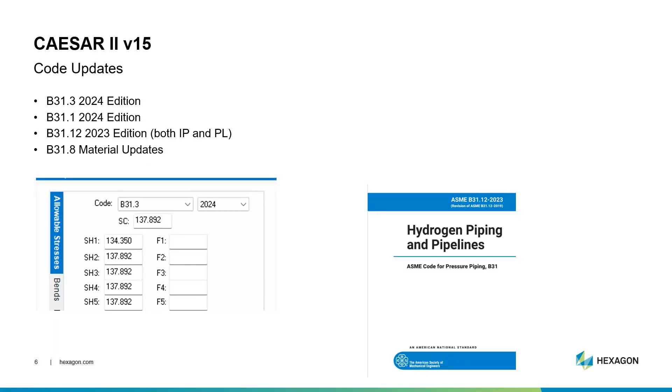This was a new code introduced in version 14 of Caesar 2. We implemented the 2019 edition, which was the latest at the time. Since we released version 14, the 23 edition was released of B31.12, so we implemented that update to both the industrial piping and the pipeline section of that code. There were some material updates for B31.8, and we implemented what I'm calling the piping adjacent codes - B31J, the updated 2023 edition for stress intensification and flexibility factors, B31G, the remaining strength of corroded pipelines standard, the latest 23 edition. And the building code, IBC 2024, was also implemented for the environmental loadings.

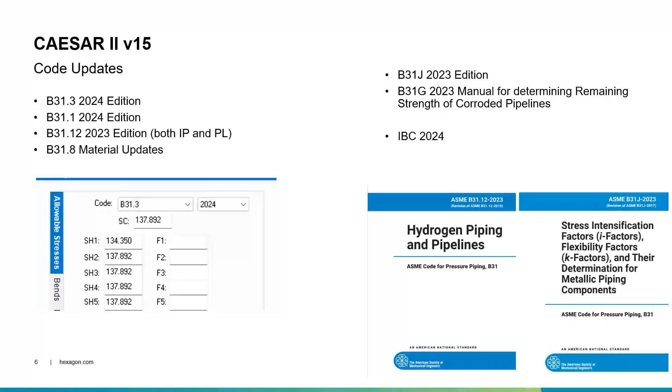Let's talk in a little more detail. Let's start with the three piping codes, B31.3, 1 and 12, that were implemented. For B31.3 2024, both the main body and Chapter 9, the high pressure piping portion - the changes in the code itself didn't have any impact on the calculation side of things. There were no changes to any of the equations within B31.3 2024 on the Caesar 2 side compared to the previous edition, the 22 edition.

But we did implement this, and it involved updates to the configuration, the load case templates, and the report templates. There were also a number of material changes. For the main body, 53 materials had updated expansion coefficients, and just over 106 materials have been updated for the Poisson's ratio and/or density according to ASME Section 2. For the high pressure piping, 51 material records were created with allowable stress values, and 14 materials had updated expansion coefficients. Quite a lot of work there with material updates.

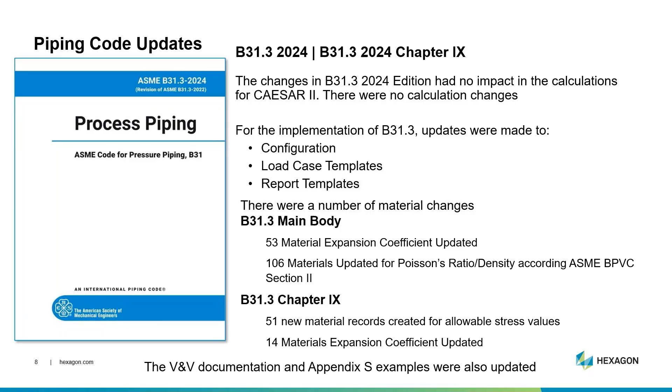Now, B31.1, similar to B31.3, the 31.1 24 edition, there were no changes to the calculation side of things, but once again we did have to implement changes to the configuration file, the load case templates, and the output report templates that were needed to ensure everything was reading correctly, showing the correct additions, etc.

And for the hydrogen piping code, B31.12, we made some updates for both the industrial piping, or IP section, and the pipeline section, the PL section. The main changes were in the IP section, and IP now refers to B31.3, so there were a number of calculation updates.

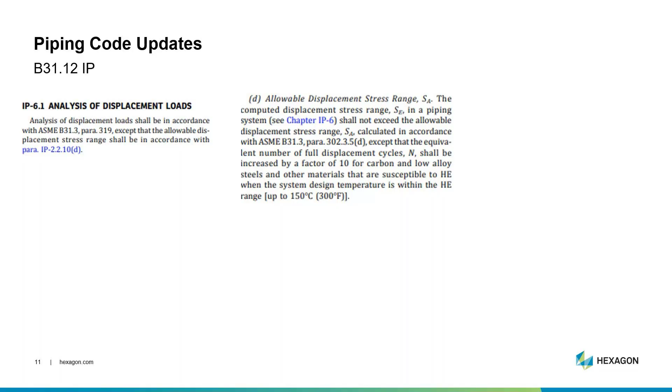So for displacement loads, analysis shall be in accordance with B31.3 paragraph 319, with that exception at the end: except the allowable should be in accordance with the paragraph from the B31.12 code, 210D, which states basically the same, however notice there is a slight difference in the displacement cycle N factor. So the only difference there between B31.3 and B31.12 is the allowable, and it's the same for sustained loads.

Analysis shall be in accordance with B31.3 para 320, except that the maximum stresses shall be as per IP 2210C, shown here on the right-hand side, using the allowables from the mandatory appendix in the B31.12 code. So the change there is all the calculations refer to B31.3 - the only difference between 31.3 and 12 is the allowables.

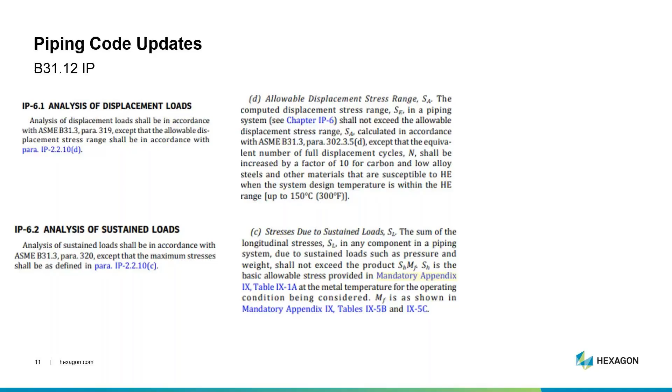And on the PL pipeline side of things, there were no changes that affected Caesar 2, but a note I want to point out is B31J is not mandatory for PL. Of course it is mandatory for the industrial piping, the IP section, because that refers to B31.3, but that's not the case for pipelines. B31J is not mandatory, but it can still be used via the B31J configuration directive.

There was one additional change for the PL pipeline side of things, made to match up with the industrial piping section, because the pipeline section isn't explicit in stating this, but we allow the user to make the choice. So the stress range factor F is allowed to go up to 1.2 for both IP, which does explicitly state it, and also the PL pipeline section. So for both of these you can use stress range factor F allowed up to 1.2 by setting the radio button as shown in the screenshot.

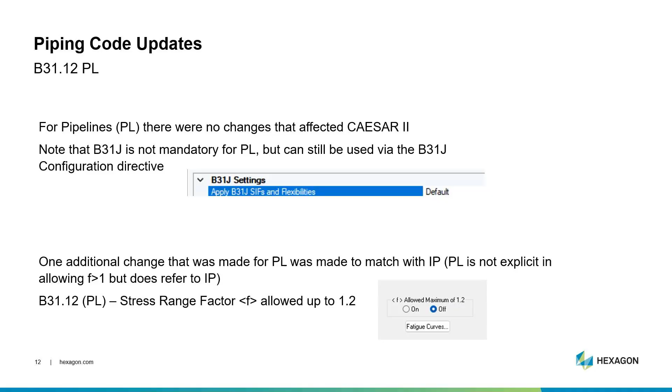Okay, now for the piping adjacent code updates, this is where there were some more involved changes. So the piping adjacent codes, what I'm calling them, meaning B31J and B31G. Let's take a look at each of those in turn, starting with B31J.

Of course we've implemented that, so that involved some updates to the calculations, and also, which will perhaps affect users a little more, a number of configuration variables. With these new configuration options, we've also updated the scratchpad interface to account for those. So let's talk in a bit more detail on this.

So we have 3 new configuration variables: use the smooth 90-degree bend correction, use sustained stress index correction for OD over T greater than 50, and welding and contour tees quality.

And then there is a change to the existing configuration, apply B31J SIFs and flexibilities. Previously that was a yes and no switch. Now we have a third option, so we have default, yes set 2017, and yes set 23.

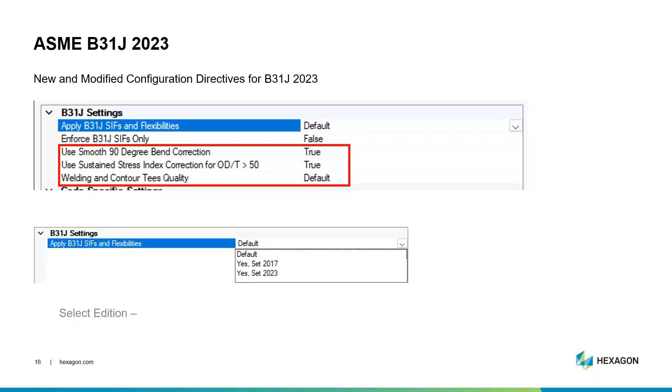So for select edition, well I guess the second two are fairly clear, but let me explain them all explicitly anyway. The option default is do as per the piping code release. So for something like B31.3, which mandates B31J, use the edition of B31J that was active at the time of the code release. For example, B31.3 2022 would use B31J 2017 edition, because that was the B31J edition effective at the time of the B31.3 release. B31.3 24 edition uses B31J 23 edition.

And for something like EN13480, B31J is not used because EN13480 has Annex H and does not mandate B31J.

If you set to yes, set 2017, that forces B31J to be used and also forces the usage of the 2017 edition. And similarly, if you set yes, set 23, force B31J and always use the 2023 edition, regardless of when the piping code was released.

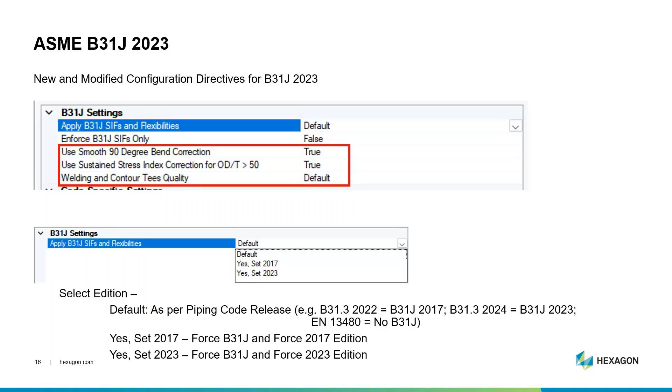Let's change there to the edition or the apply B31J SIFs and flexibilities switch. But what about the new configuration switches? We have three of those. First one, use the smooth 90-degree bend correction. This is all related to note 3 from B31J, and this is a fairly highly requested item. It was something I've been asked for a number of times personally, and I've seen a lot of requests come in for this setting.

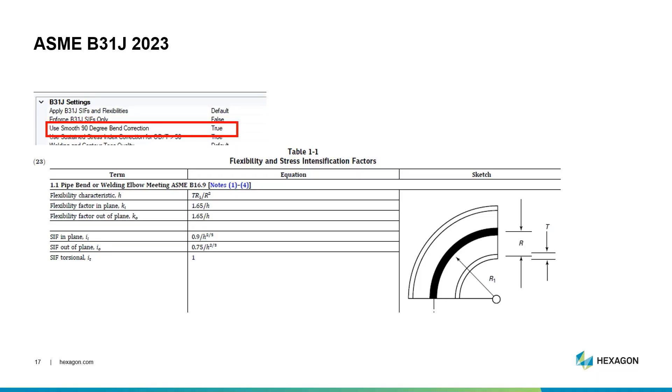So the point is, if I activate this, we can see all the images now. Note 3 is the key part here, which states when the bend angle is 90 degrees and the bend thickness is equal to that of the pipe, the flexibility factors may be found from 1.3 over H. Now, table 1.1 gives a flexibility factor of 1.65 over H, but note 3 says for 90-degree bends, use 1.3 over H, which is a more accurate value for a 90-degree bend. The 1.65 over H is more applicable for larger angle bends, like a 180-degree return bend. 1.3 over H is a better flexibility factor for a 90-degree bend.

So we have the use smooth 90-degree bend correction, which will use the 1.3 over H for a 90-degree bend if the factor is set to true. Set the value to false, you use 1.65 over H.

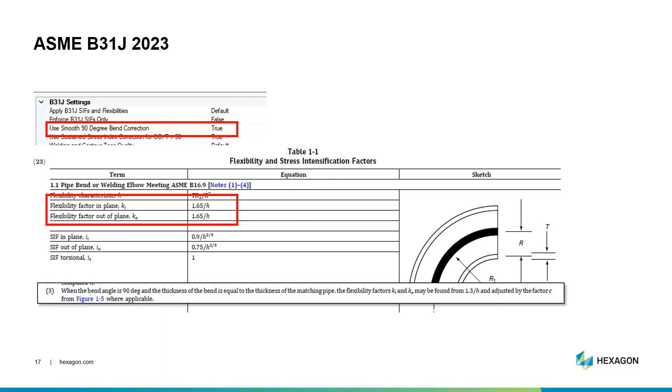And finally, the one that will probably take a little more explaining, the welding and contour tees quality. This is according to note 6 from table 1.1. That's the table you saw a few minutes ago, at least an extract for bends. Of course, it goes on to give the equations for the T's and so forth. But anyway, note 6...

...shows sidewall thinning, undulation, and so forth can reduce fatigue life. The sketch 2.1 stress intensification factors are based on components free of defects. Sketch 2.3 stress intensification factors, that's an unreinforced fabricated tee, may be used as an alternative. And when sketch 2.1 stress intensification factors are used, divide the factors K and I by 1.26 and use T over T equal to 0.6.

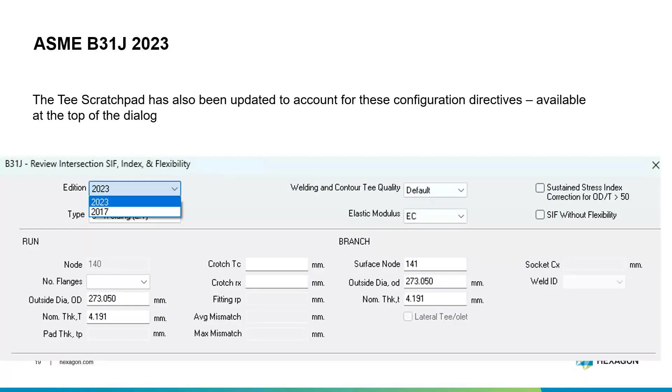So these are all our new configuration settings, and to go along with those, we have updated the scratch pad as well as the configuration file and all the calculations behind it. We've added these at the top of the dialog box. Under edition, you can choose 2023 or 2017. By the way, if you change the edition, it will change some of the options. For example, welding and contour tees quality: default, verified, or imperfect. Those are different. For 2017, you won't see the imperfect option there.

And we also allow you to change on the fly the sustained stress index correction for the scratch pad, so you can see immediately in the scratch pad the effects of changing all of these.

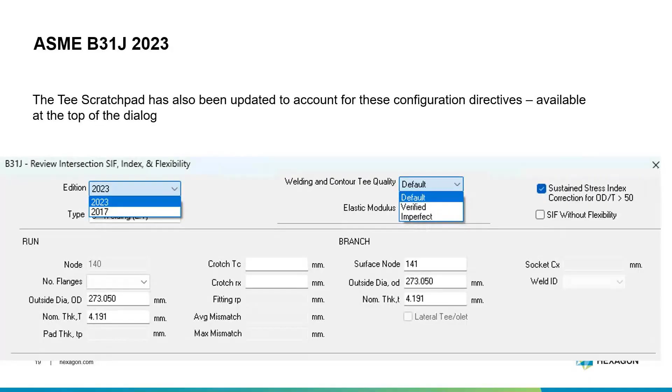Okay, that's everything on B31J. As I said, we also implemented B31G. So B31G is the manual for determining the remaining strength of corroded pipelines. The latest edition is the '23 edition, which we've implemented changes to the calculations, the input and the output were made. Firstly, users can choose the edition. You can select the old 2012 or the new '23 edition.

For 2023, there is a new field that has been added called S-flow. It's a parameter that's used to calculate the failure stress at a given flaw, failure stress SF.

When the failure stress is greater than the hoop stress at the operating pressure, the flaw is deemed to be acceptable. B31G gives a number of definitions of S-flow based upon conditions of temperature, material, yield, or tensile strength and composition. You can choose from the drop-down list, S-flow definition, selecting from the various ones available from B31G, or you can add a custom value as well, so we can account for S-flow.

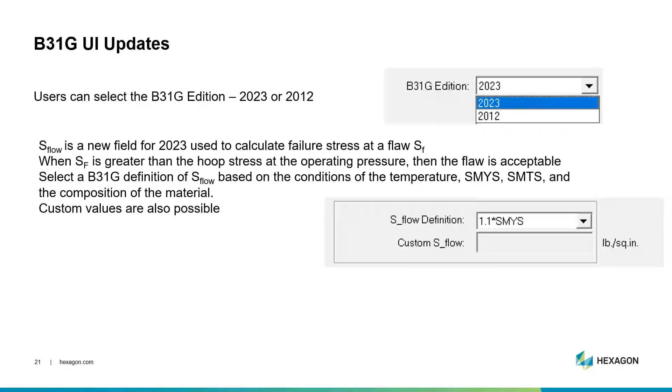We also added some additional material fields. The UTS at operating and the minimum tensile strength at ambient are new fields that have been added. For the yield strength, specified and the minimum yield strength fields, they existed, but we've improved the labels so they're a bit clearer.

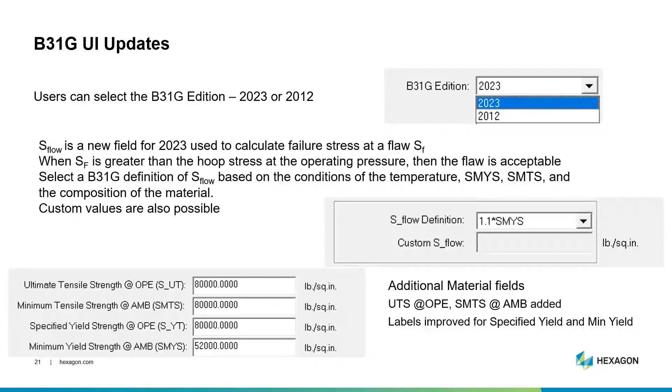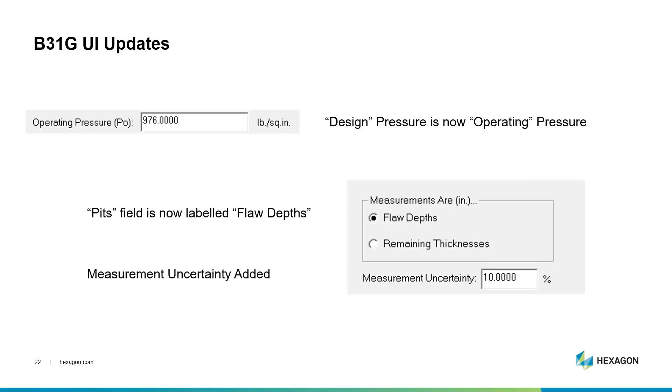We've also made some small changes to the labels. What used to be design pressure is now operating pressure. The field that used to be called pits is now labeled as flaw depths. And we added a new field for measurement uncertainty, again, as per the standard.

And then the output report has been significantly improved as well. Firstly, of course, the report header shows the edition now that there is a choice of editions to select from. So we show that at the top on the report header.

A very useful change is the allowables are repeated. They're shown again directly above the final results table. Instead of you having to scroll right up to the top of the report to find what the allowable values were, we print those directly above the results for ease of use.

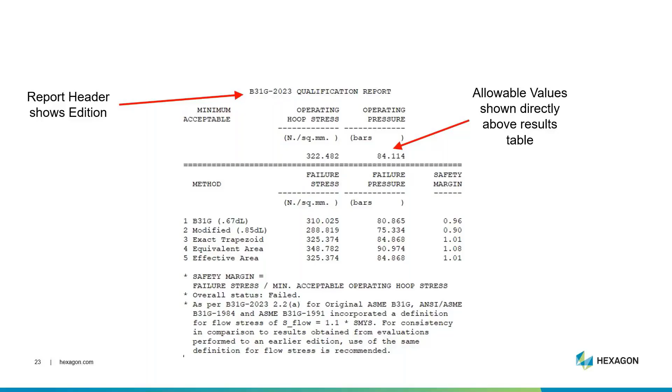We added a new column to the table for the safety margin, along with the definition of what the safety margin is directly below the table, which is the failure stress divided by the minimum acceptable operating hoop stress, as you can see highlighted.

And we print also the overall status of pass or failed. So addition of the new code and significant improvements to the output report have been made for B31G for effectively fitness for service.

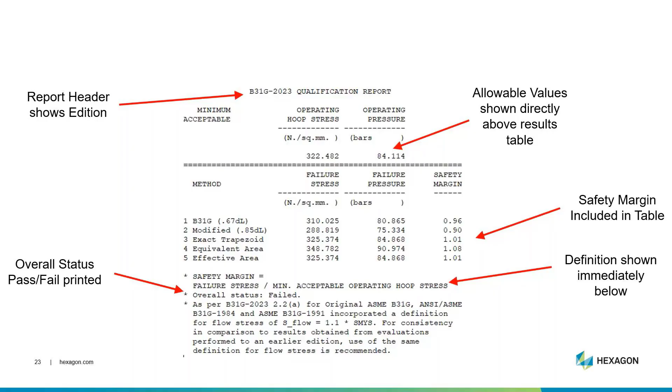Okay, now away from the piping codes, we also have updated the building code, the IBC code, as has been stated. International Building Code IBC, the 2024 edition was implemented.

And IBC, in terms of the calculations, refers to ASCE 7 for both the wind and the seismic load analyses. Because of that, we didn't require any additional input fields for either wind or seismic. So no additional input fields were needed, but we did make some changes.

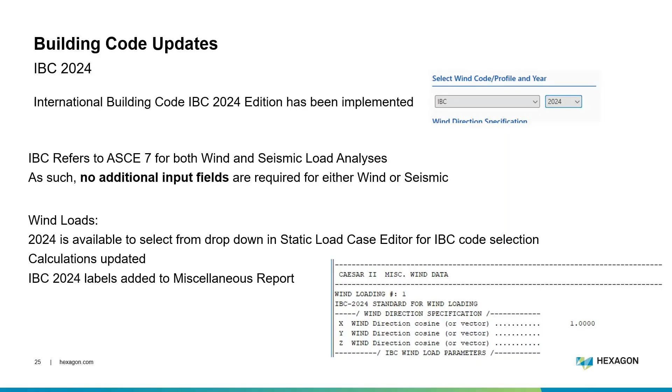And on the seismic side of things, again, as stated, the calculations refer to ASCE 7. So for the static input in the static seismic wizard, the ASCE 7 entry was changed to read ASCE 7/IBC 2024. Same inputs and same calculations there.

And we added 2024 as an available option in the dynamic analysis, dynamic input for the spectrum generator. 2024 was added for the IBC option there.

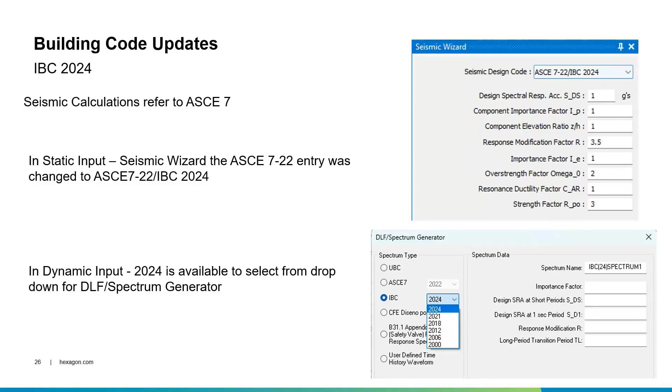Okay, now multiple piping code refactoring. Well, what is this? It's probably not so interesting for a user in terms of what we did, but historically, CAESAR II, when it was originally designed, wasn't designed to have multiple editions of piping codes.

So we did some refactoring. Again, it's not so exciting for you as a user what we did, but it was quite a large job that was undertaken. It took us probably about the same effort as adding a brand new piping code from scratch, but it means we can add new piping code editions such as B31.1, B31.3 much quicker. In fact, we did those two in parallel within a couple of sprints, whereas before it would have taken longer than that to do a single piping code update. So it's much easier.

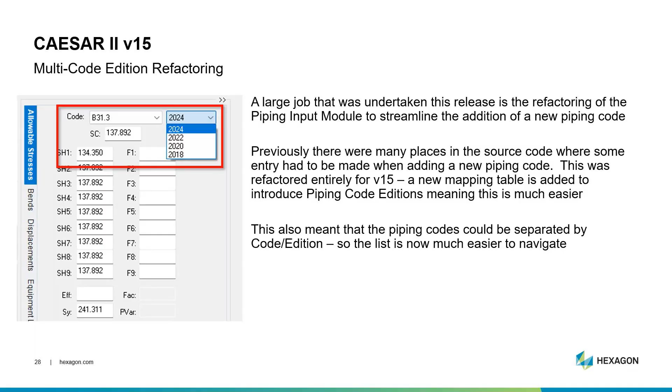There's a red box in case you couldn't notice the change itself. But the point is, moving forward, our velocity to add new piping code editions when they get released will be much quicker.

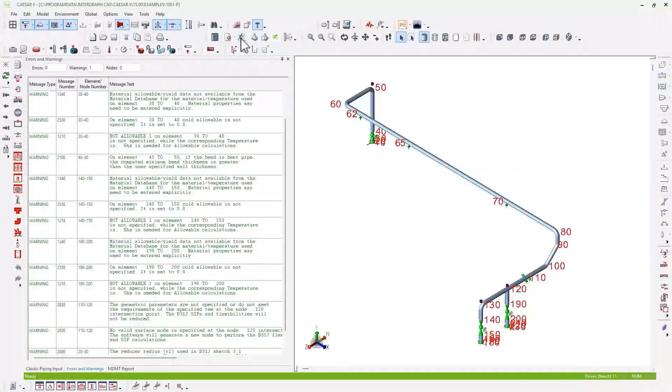It's somewhat difficult to explain using words, so perhaps a video is a little clearer. I'm going to quickly run the analysis on this particular job, one of the example files for CAESAR II.

Then I'm going to build a report. I want the input echo shown, but I don't want the little dialog box that pops up every time you view the input echo, so I've unchecked the user interaction checkbox.

I'm going to add a few reports now into the list. Let's add... I changed my mind, the stresses report, not the stress summary report. Restraint loads, your typical reports, restraint loads, and I think one final one - there is a nozzle check in this job as well.

Now I also want to send these to Word, but I've just had a thought - hang on, the node numbering is not great in this model. I've gone through and added some intermediate node numbers, intermediate restraints. You can see there, 62, 65, just for...

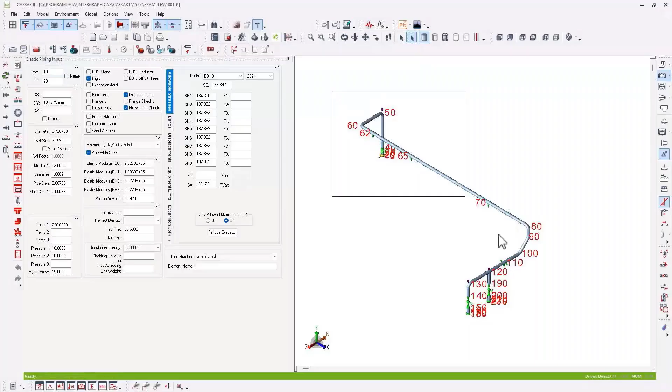So I think that is something that, if you've been using CAESAR II trying to build your reports, going back to the input, and then coming back to the output thinking 'oh, I've got to build the whole thing again' - that frustration will now be gone. Everything will be remembered, and it should save quite a lot of time for you as the user.

This video will demonstrate the report booklets in CAESAR II version 15. First I'll run the analysis from one of the sample jobs, and I'm now going to build up the report that I want to export.

I want the input echo, but I don't want the dialog box that pops up when you run the input echo, so I'm going to uncheck the user interaction box. I'm now going to add a few more reports into the list.

Perhaps some stress reports, maybe not the stress summary, maybe the stresses report. The restraint summary, and I believe this job has a nozzle check as well, so I'll add the nozzle check report.

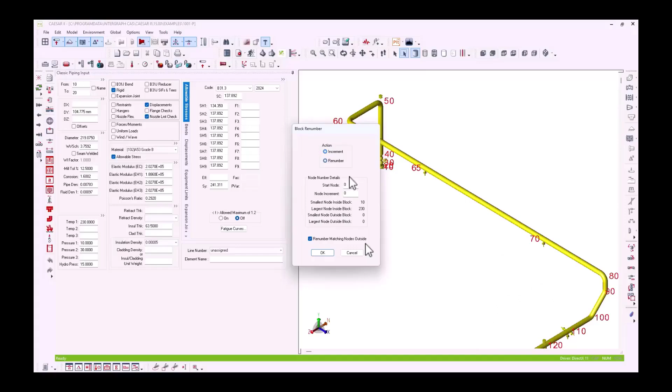I also want to send these to Word, but I've just had a realization that perhaps the node numbering's not so great. So I'm just going to go and renumber the nodes. Returning back to the input, I'm just going to do a quick renumber. We've got 60, 65 and so forth. I'm just going to renumber those so everything increments by 10. It's a nice clean model.

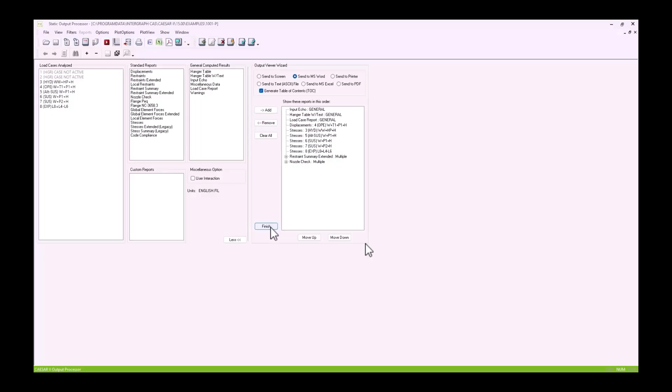And of course rerun the analysis to take effect of that. But notice now that all the reports I selected are retained - I don't have to rebuild the report. The user interaction box and the Word radio button are also still selected. This is where the report booklets can save a lot of time for the user. All I need to do is hit finish.

There were a lot of enhancements made to Caesar 2.15. A number of piping codes, B31J for example, was quite a significant undertaking. But that's not the only thing you're going to see in the very near future for Caesar 2.

So everything you've seen up to now is Caesar 2 version 15.0. But we do have Caesar 2 version 15.1 coming quite shortly as well, and this is really the only enhancement that will be in it. There are no additional features, no new piping codes or anything like that. It's, let's say, a service pack for Caesar 2, but it will include a large new module called the New Analysis Reviewer.

So this is a brand new output viewer. It will include some enhanced capabilities that I'll go through briefly over the next few slides. It is a new module built completely from scratch on modern architecture, modern development techniques, modern software, so it has superior performance. It's fully 64-bit, for example. It uses completely different technology for generating the Word, PDF, or Excel output files, so the report generation is significantly updated and enhanced, and a lot faster and more stable.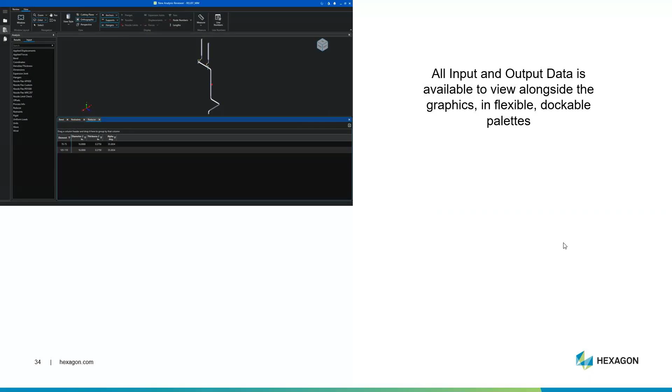So what is this New Analysis Reviewer that I keep talking about? Well, this is what it looks like in the screenshot in the top left-hand corner. It's a brand new output viewer to review all the data, tabular and graphically. All of the input data and output data is available to view alongside the graphic in flexible, dockable palettes.

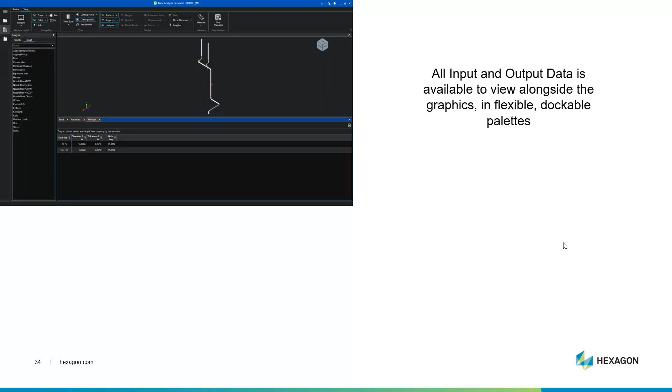So the example here is the relief example from CAESAR II's examples folder. Perhaps it makes more sense to view this one with a vertical split rather than a horizontal split, so that's what I've done, docking the panel on the right-hand side rather than below the graphics.

You can add multiple viewports, as many as you wish. We've got out-of-the-box setups for a single, 2x2, or 1x3 viewports, but you can add as many as required. You can also tear off these viewports and keep them on separate monitors, for example.

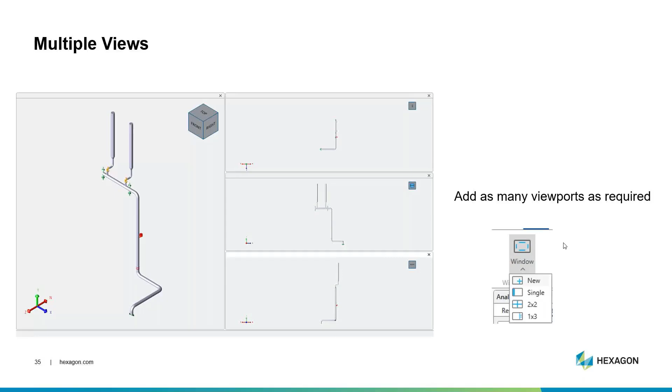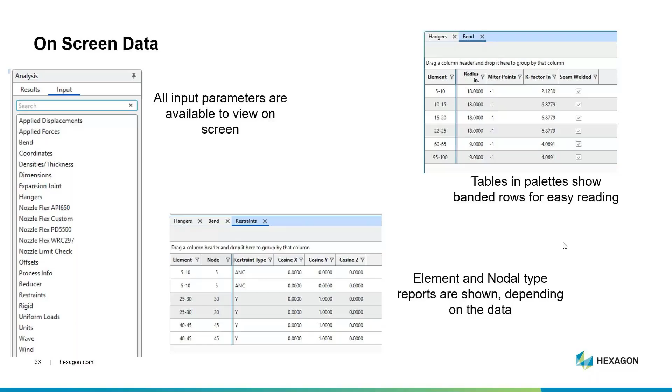All of the input parameters will be available to view on the screen in a tabular format. The tables are shown in palettes with banded rows for easy reading, just like the static load case editor. Depending on what report or data you're viewing, the data is shown either by elemental or nodal type of report. Any grouping and filtering is available on the fly, just the same as in the static load case editor. It's the same type of functionality.

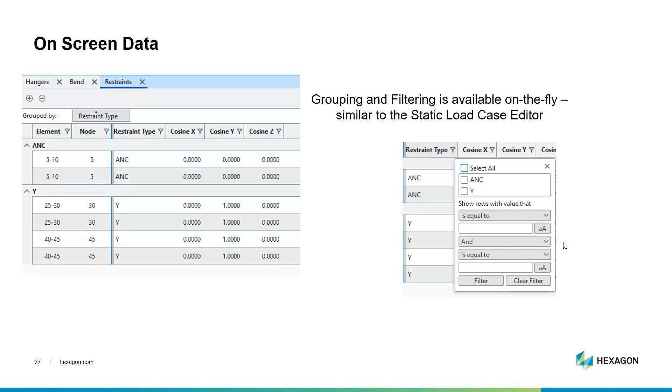So you drag and drop a column heading to group by that column, and hit the filter icon to add filters to that particular column as well. And of course, all the output data will be available, so all the reports for all the load cases will be available for you out of the box.

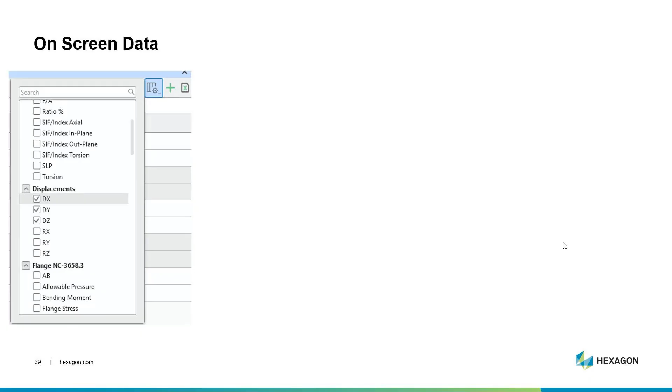And customization is significantly easier. Within here, you can simply hit the icon shown there highlighted to, on the fly, adjust any of the report data, just choose which column you want to view by checking the box. And you can save that as a new report type at any time as well, using the green plus button to create a brand new report to save for use in the future, if it's not just an on-the-fly setting that you want.

And if you hit the Excel button, the quick report that you've just generated can go straight out to Excel. Any modifications that you've done in the panel—sorting, filtering, and so forth—they are retained in the Excel as well.

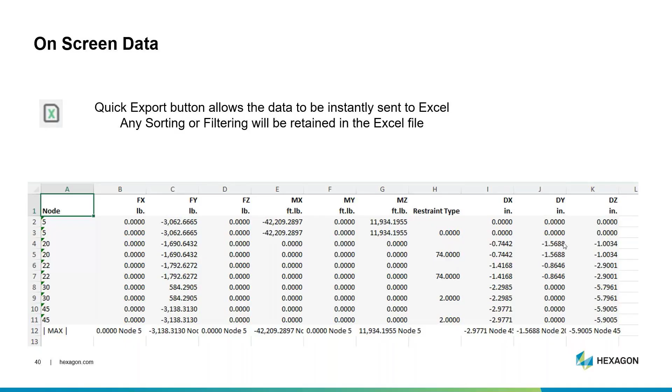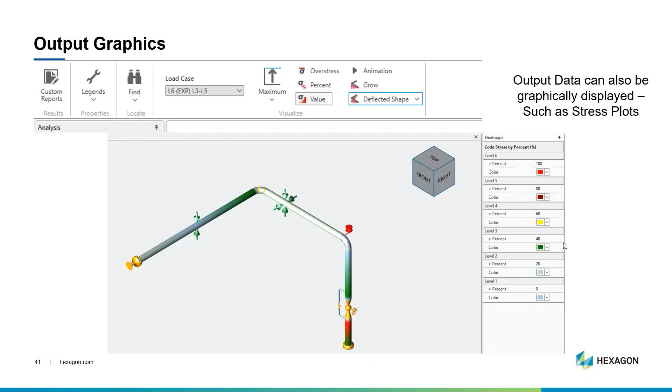All of that output data, well, you can display this graphically—for example, the stress plots that can be shown, you can plot those graphically. The heat maps are available, or the deflected shape can be displayed. With the deflected shape, an improvement there is a slider to adjust the deflection scale, so you don't have to guess at a number for the scale—you can just use the slider.

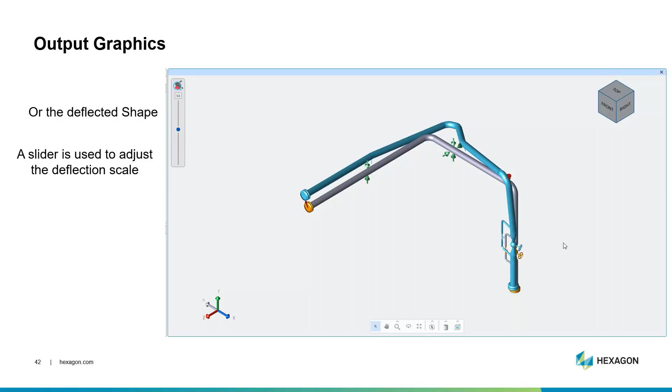One thing I don't have a slide on—this is showing all the output data, but all of the input data is available as well, just like you have now in Caesar 2, where you can color the model by plotting pipe diameter, wall thicknesses, temperature, pressure, everything that you input. That's all available as well as the 3D plot option also.

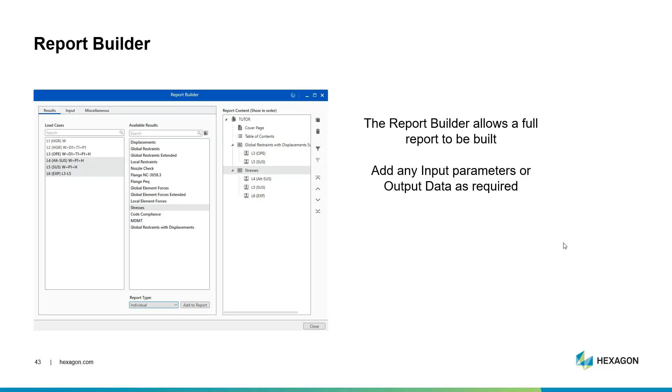And in terms of the report builder itself, for the final report that you want to send out to Word or Excel, for example, this allows you to build a full report using the report builder. Any of the input parameters, any of the output data can be displayed, and filters can be applied on varying different levels. The main full report builder also shows a live preview in the center section.

As you can see here, I'm highlighting the filter icon. The filters can be done, and it's all done like a hierarchy. So you can filter on individual reports, or you could apply a filter at maybe the displacement level, or even the parent level. You can filter at different levels.

You get the live preview shown in the center, so you can see what your report is going to look like. Something, of course, you don't get in Caesar 2 today. This will be available.

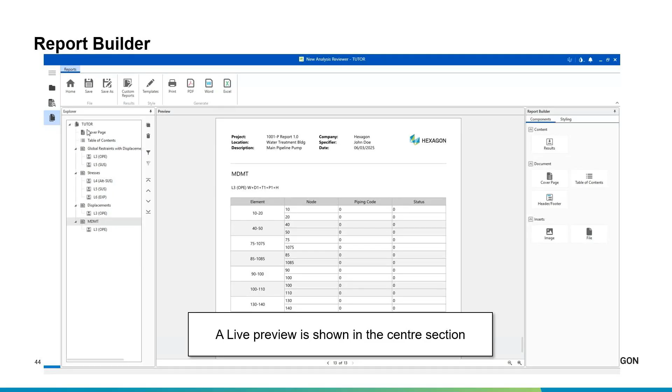As well as all the results that you have, including the input data and the output data, you can also attach any custom data as well. Any custom documents, any custom images, maybe you've got plots that you want to show, like heat maps, you may want to include those as an image. You can do that. Maybe you want to include the isometrics, you could include that as a PDF file. So it just makes it a lot easier and means you don't have to manipulate the report outside of Caesar 2.

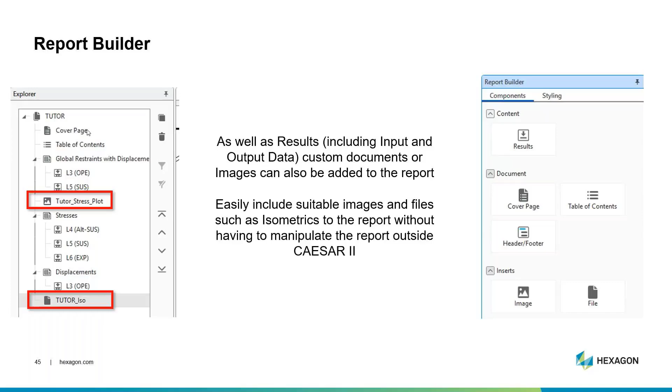And you have complete control over the styling as well. The styling of the reports, the tables and so forth, you can customize those directly within the report builder. You don't have to, like you do now with Caesar 2, go configure a Microsoft Word .dot template. You can just do this directly within the report builder. And that goes for the headers and footers as well. This is all going to be available for you to do in the output viewer.

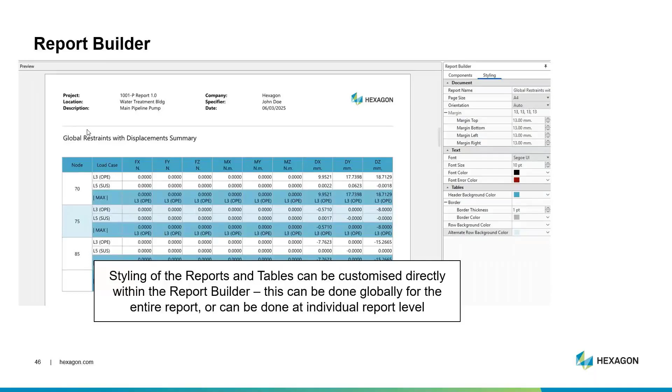And then, of course, finally generating the file. The biggest difference you'll see is the viewer uses a completely different, modern technology to generate the document itself. It does not use the same methods as Caesar 2's legacy output viewer. And what this means, probably the biggest difference you'll see, is the improved performance and stability. I've generated files that are starting to push the limits of what Word can handle.

I've got jobs that take maybe about 90 seconds for Caesar 2 to generate. It takes perhaps 10 times that for Microsoft Word to actually open the file. These are thousands and thousands of pages that I've created in testing. Obviously that's probably not realistic, but we're trying to push here and we're pushing Word, while the actual report generation is very, very quick, and it's also stable.

You're not going to see, the second time you generate a report, an error message and have to try again, for example.

So all of this, and I know I did this very quickly, but this is Caesar 2 15.1, not 15.0. So what is Caesar 2 15.1? Well, it's scheduled for release around about November this year. So coming up now in the next few weeks, Caesar 2 15.0 will be released. Then later this year, Caesar 2 15.1 will be released, which will include the output viewer.